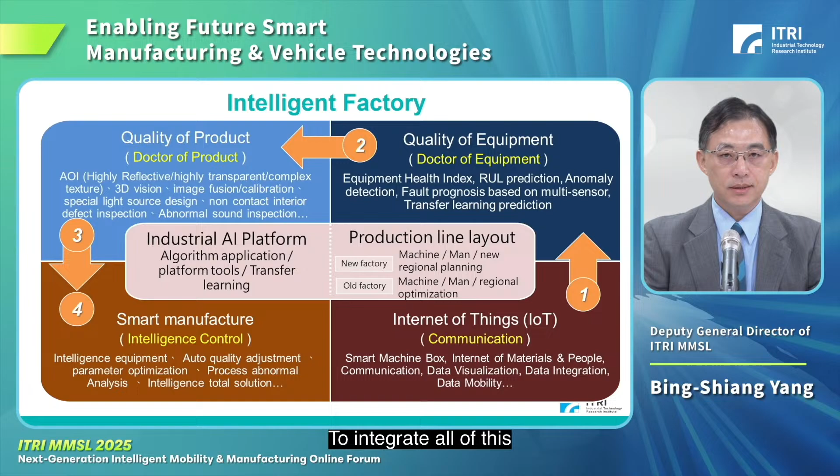For the intelligent factory, we try to connect equipment and materials together with the Internet of Things. We also have sensors integrated with our algorithms to quantify the status of the equipment, then connect the equipment together with the parameters. We also incorporate AI technologies in different stages of manufacturing to control the quality of the product. By integrating all of this, we can make the manufacturing process smarter. Here is an example: we are now trying to integrate systems into a 3D composite braiding system.

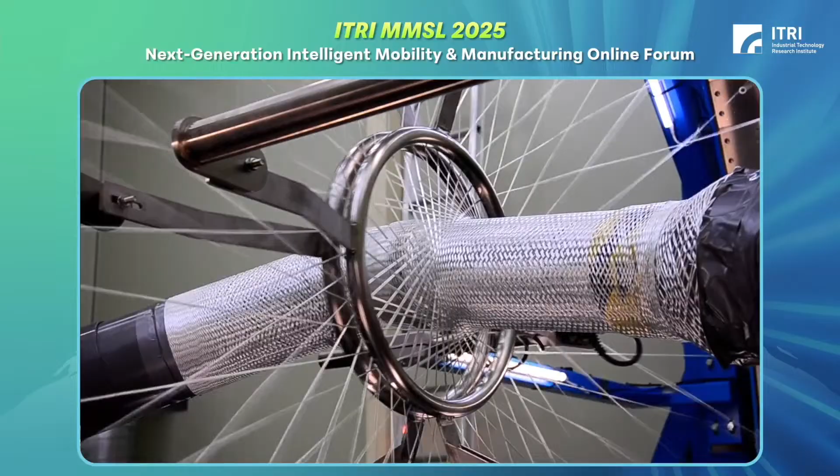As a world trend of low carbon or zero carbon emission, we try to reduce the energy consumption in different manufacturing processes with different strategies. The first one is to provide high efficient motors that can be used in different stages of manufacturing, and also low carbon thermal management systems with energy storage applications, such as high-speed flywheel technologies and supercapacitor technologies.

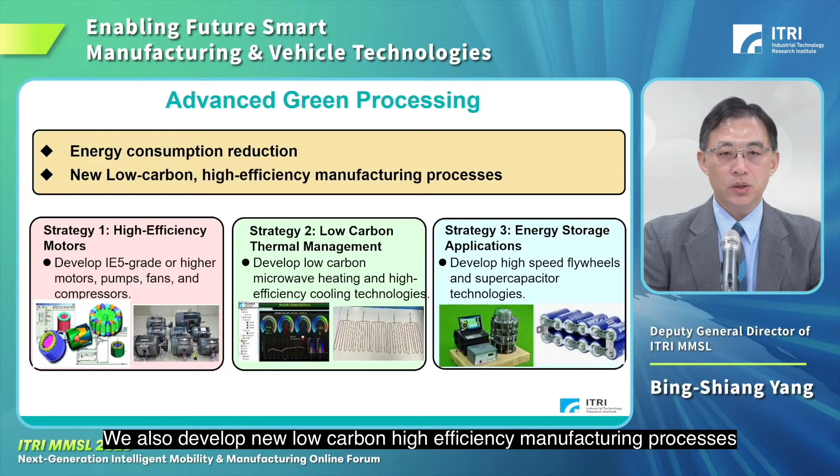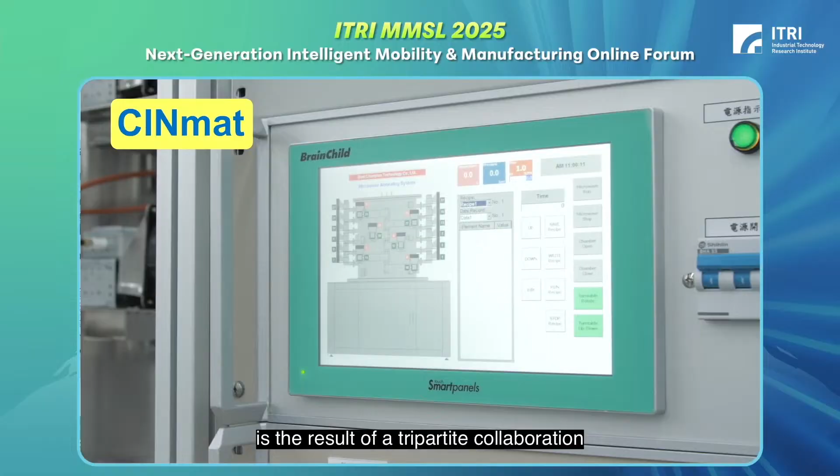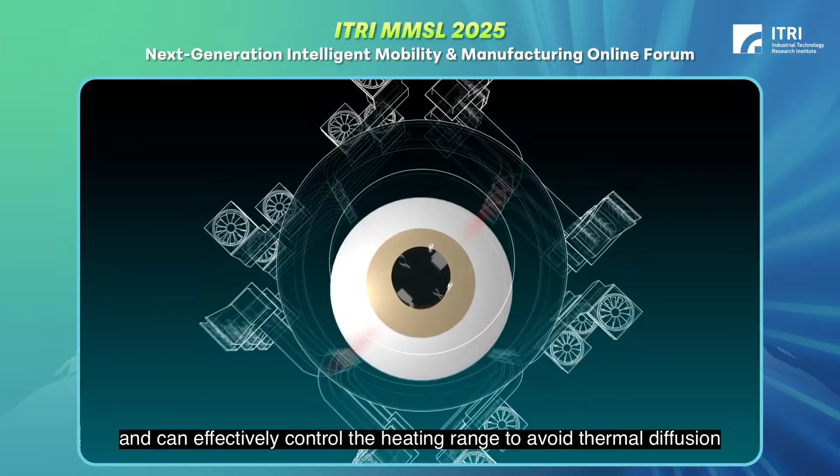We also developed new low-carbon, high-efficiency manufacturing processes. Here is an example: CINmat microwave annealing technology, the result of a tripartite collaboration between ITRI, National Jiao Tong University, and National Nano Device Laboratories. It can process multiple wafers at one time and effectively control the heating range to avoid thermal diffusion.

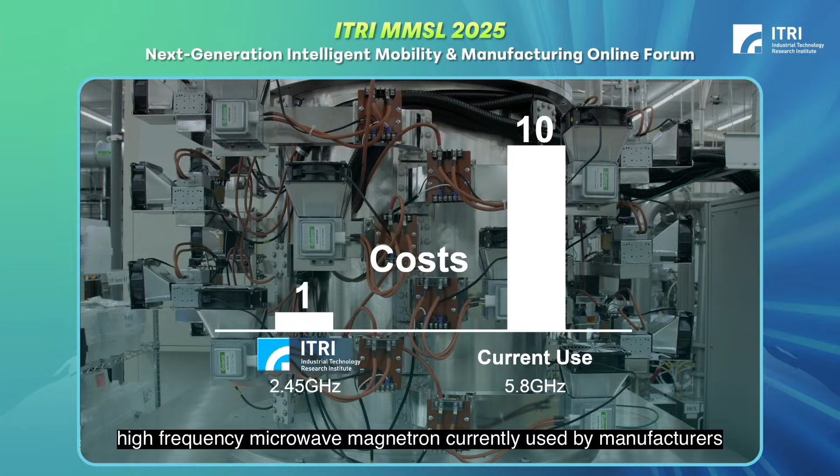The technology saves a great deal of time and energy compared to rapid thermal annealing. The frequency of the microwave tubes used is 2.45 gigahertz, the same as a typical domestic microwave oven. A 2.45 gigahertz magnetron costs only about one-tenth the price of the 5.8 gigahertz high-frequency magnetron currently used by manufacturers, while its average lifetime is six times longer, greatly reducing maintenance costs.

As you might know, Taiwan is famous for semiconductor manufacturing. We also have a division dedicated to these technologies, so we use multi-physics simulation in different stages of the manufacturing process, such as plasma etching or deposition, and wafer process for advanced packaging. We also provide grinding and polishing equipment that can be used on different materials, including optical components.

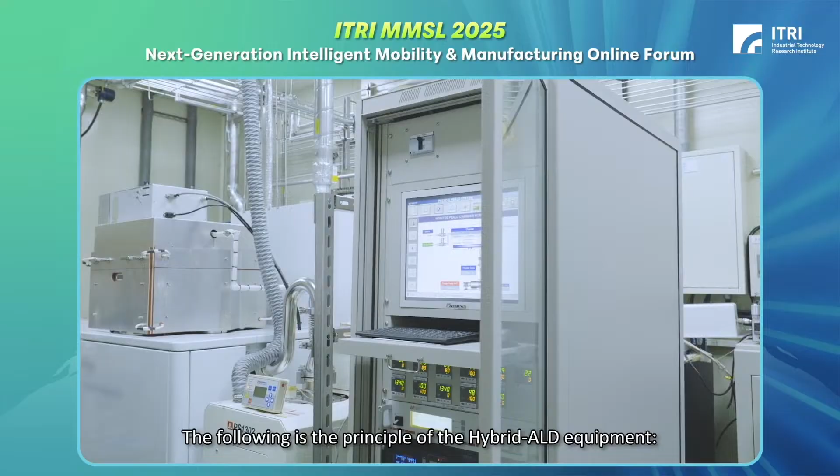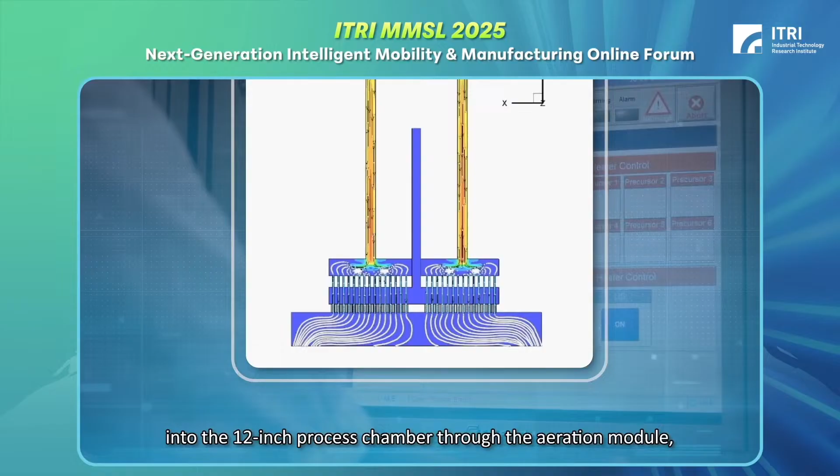We also integrate low fluoride or low carbon equipment in different industries for green technologies. The following is the principle of the hybrid ALD equipment. The vertical flow field is simulated by multiple physical coupling methods into the 12-inch process chamber through the aeration module, and the special aeration hole design is used to improve the uniformity of the overall chamber flow field.

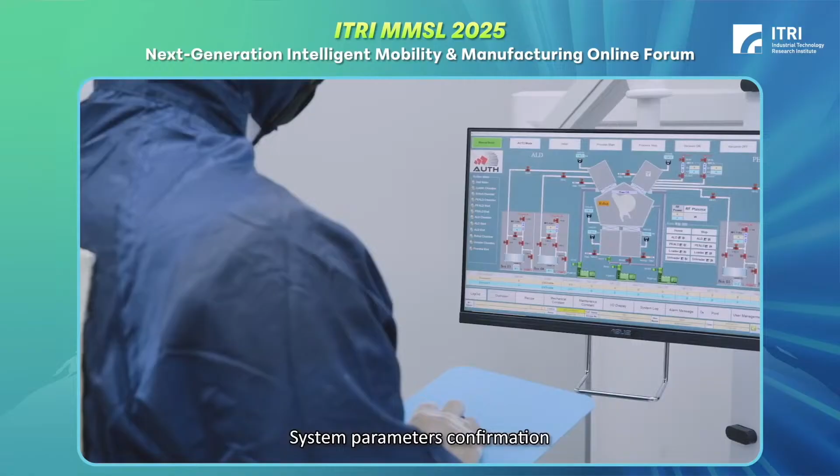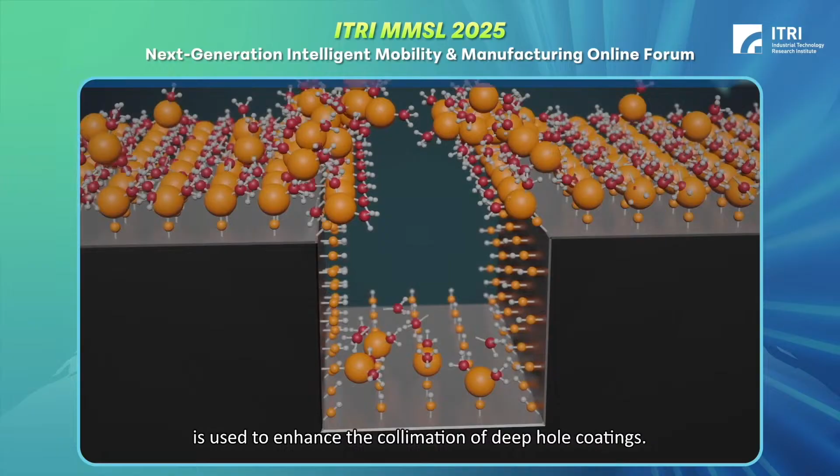Place the cassette into the wafer loader. System parameter confirmation. By adopting the crossover flow multimodal ALD technology, the thermolysis and plasma bias dual mode is used to enhance the collimation of deep hole coatings, thereby improving the compactness and deposition selectivity of the film layer, achieving multi-composition, high-step coverage, and uniform coating deposition. The robot arm removes the wafer from the process chamber and transfers it to the discharge chamber.

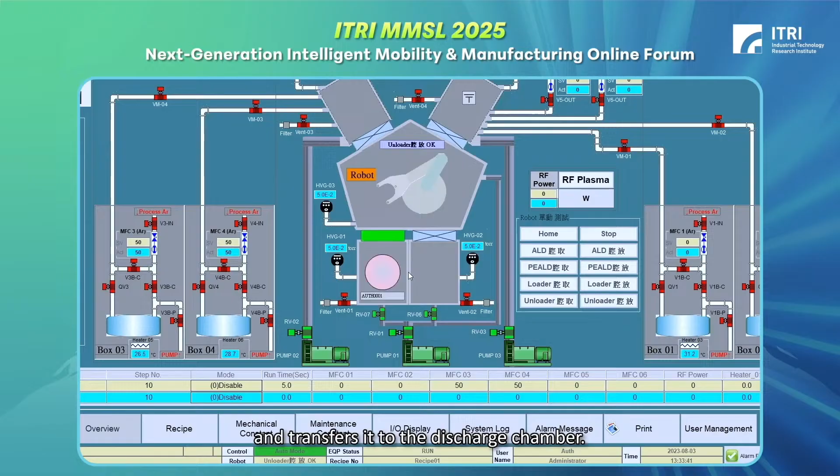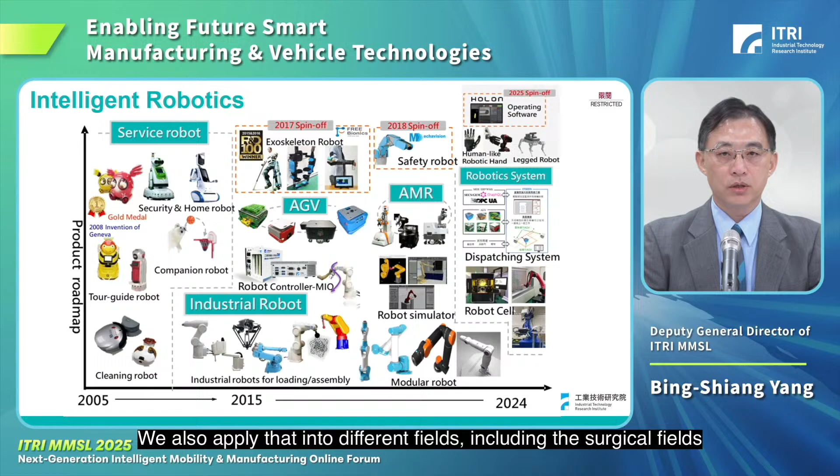To combine the different manufacturing processes, we need robotic technologies. Over the past 20 years, we have developed different types of service robotics, industrial robots, AGVs, and AMRs. We also apply that into different fields, including surgical fields. We recently have had international collaborations with many European countries on handling with AI-enhanced robotic technologies for flexible manufacturing.

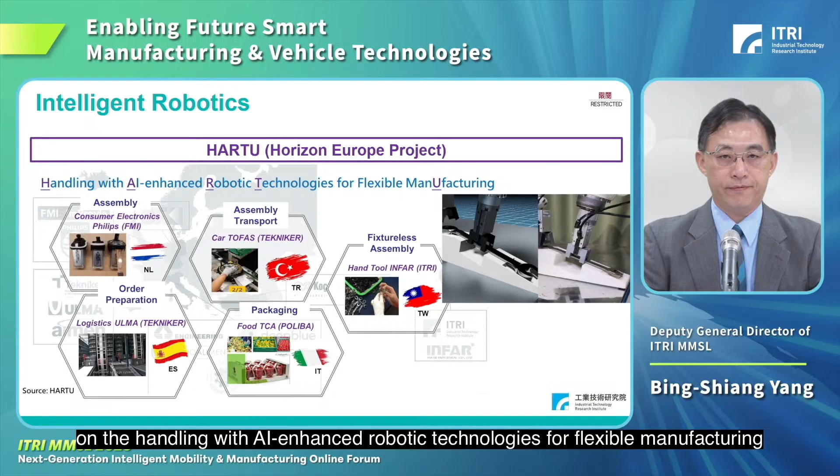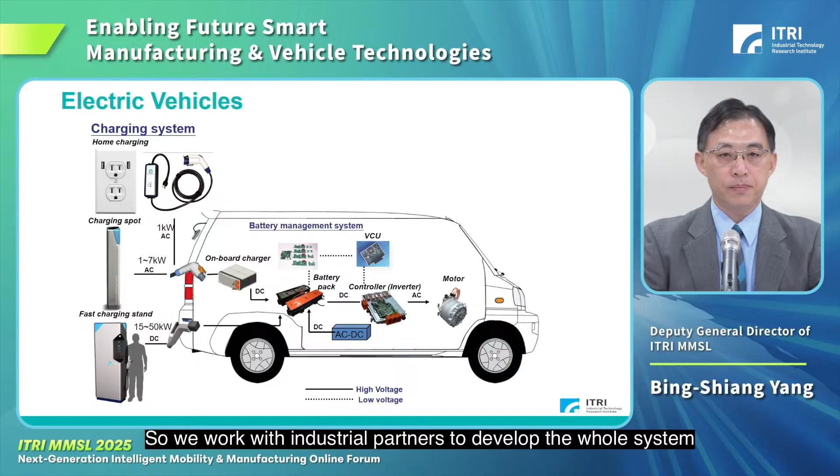That's for manufacturing. Now for mobility, we developed technologies to fulfill the needs for electric vehicles, from fast charging station, onboard charger, battery pack, battery management systems, vehicle control units, even inverter and motors. So we work with industrial partners to develop the whole system.

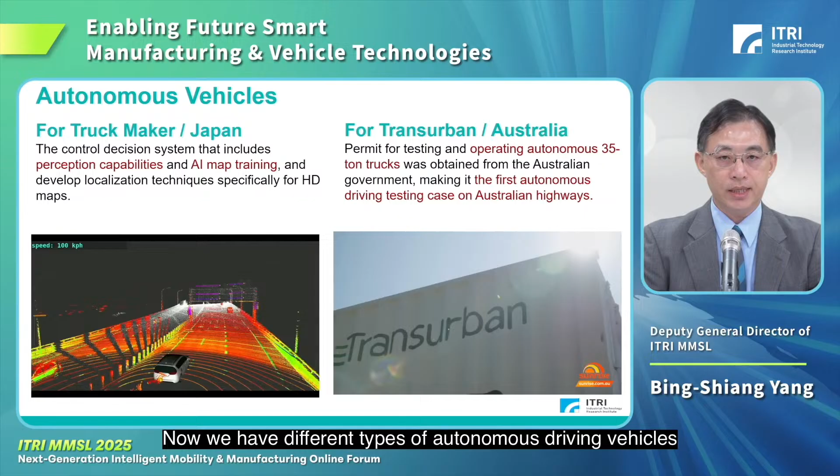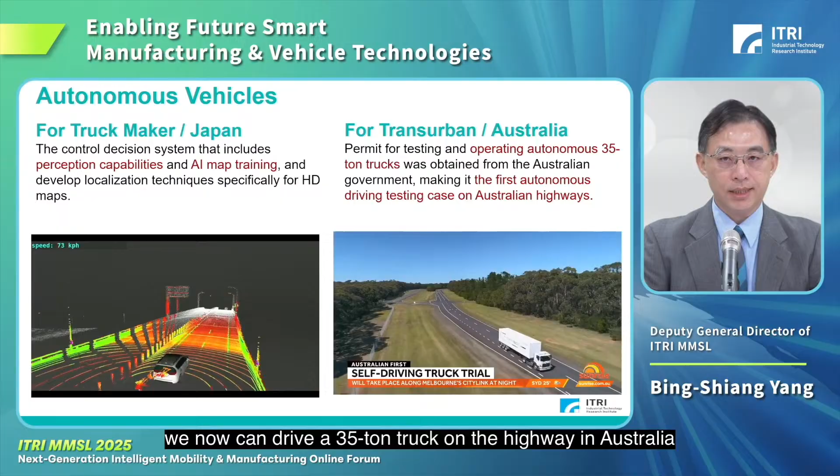We are also the first team to have the driving license to drive our autonomous driving vehicles on the real road. Now we have different types of autonomous driving vehicles. We also export these technologies to international partners, such as in Japan, where we now have high-definition map technologies. And in Australia, we can now drive a 35-ton truck on the highway.

That's for ground vehicles. In the air, we also have unmanned aerial vehicles. We target more on the high payload, specific application UAVs. Over the past few years, we have developed flight control technologies, high power motor generating technologies, and integrated them into systems with different payloads and applications.

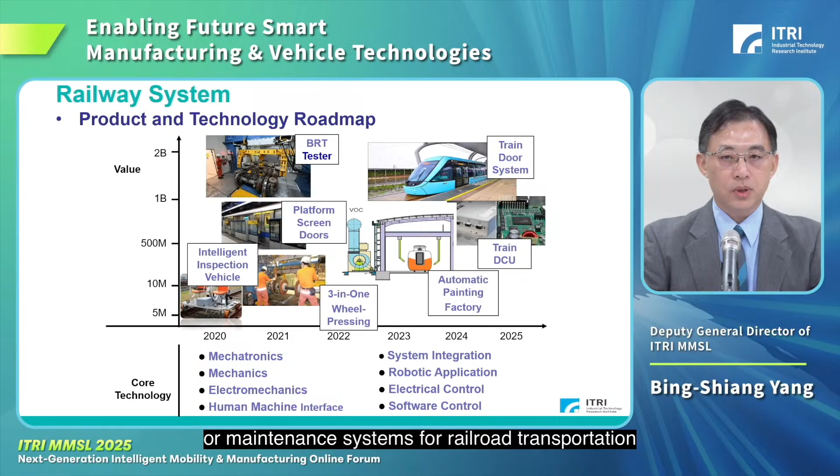In many developed countries, railroad transportation is a good means to transport from one place to another. So we have helped our railroad companies develop BRT testers, platform screen doors, intelligent inspection vehicles for railroad tracks, and automatic painting factories. We target more on the operational or maintenance systems for railroad transportation.

So with this, I give you a quick overview of our capabilities. If you are interested in any of the technology, feel free to contact us.

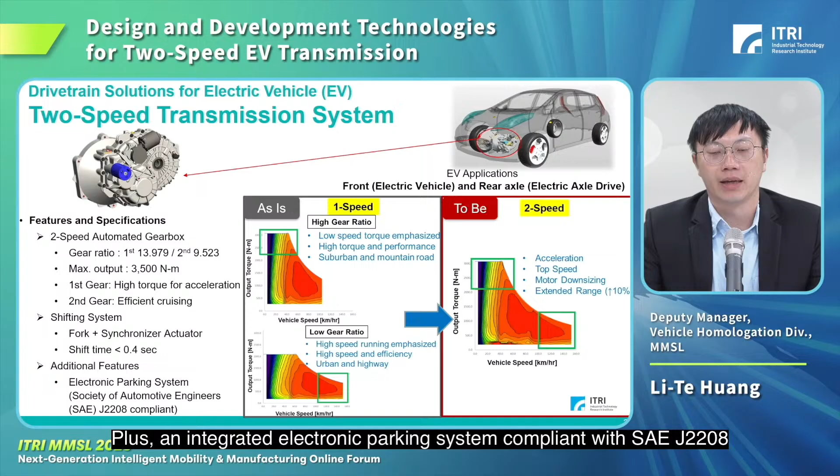Now, let's look at the specifications. Gear ratio of about 14 and 9.5. Maximum torque output of 3,500 Newton meters. Faster shifting in under 0.4 seconds. Plus, an integrated electronic parking system compliant with SAE J2208.

This slide highlights the core technical feature of our two-speed transmission systems. I will guide you through the three main areas that determine its performance and reliability.

Firstly, gearbox life calculation. To ensure durability, we perform comprehensive gearbox life calculations using model-based design tools and real-world load inputs. We built a multi-body dynamics model of the system to simulate torque cycle, bearing loads, contact stress, and thermal effects. Using this method, we predict a service life of 200,000 to 400,000 kilometers. This approach reduces development risk and accelerates design validation.

Next, two-speed gear mechanism design. The core of this system is a dual gear layout that provides high torque at low speeds and efficient power at high speeds. We optimize the gear structure, tooth geometry, and the torque path to achieve both high performance and compact design. The mechanism also integrates shift actuators and clutches, allowing flexible packaging for front or rear axle configurations.

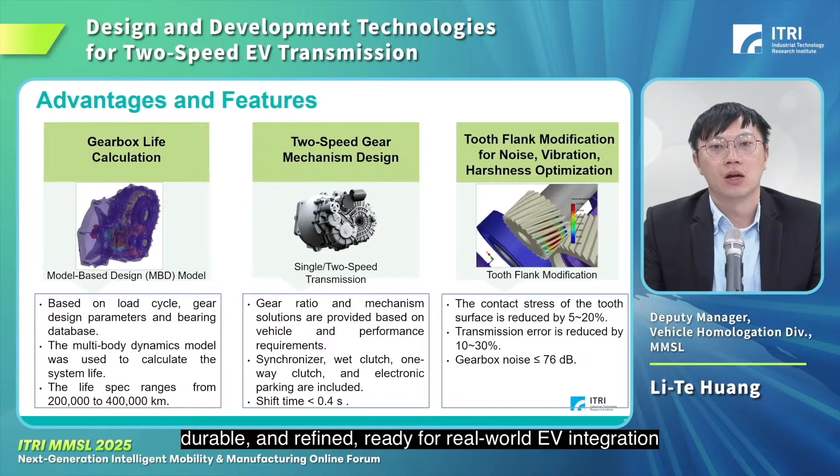Third, tooth flank modification for NVH optimization. To reduce noise, vibration, and harshness, we use tooth flank modification techniques, such as profile crowning and microgeometry correction. This adjustment allows smoother meshing impacts and smooth torque transfer as a result. Gearbox noise remains below 76 dB, meeting the quietness expected in electric vehicles. Together, these technologies make our two-speed system efficient, durable, and refined, ready for real-world EV integration.

At ITRI, we don't just build gearboxes, we provide complete drivetrain design support. From simulation to full documentation, this slide outlines the range of services we offer to our industry partners. Starting from the top row, we begin with vehicle-level simulation, including load cycle synthesis, vehicle modeling, and performance prediction. Next, we move into system layout and concept planning, such as power flow diagrams and transmission architecture.

In the third row, we focus on subsystem design, covering gears, synchronizer, clutches, electronic parking modules, and housing components. The fourth row centers on system level analysis, including integration, life estimation, gear contact patterning analysis, structural and modal behavior, and NVH performance.

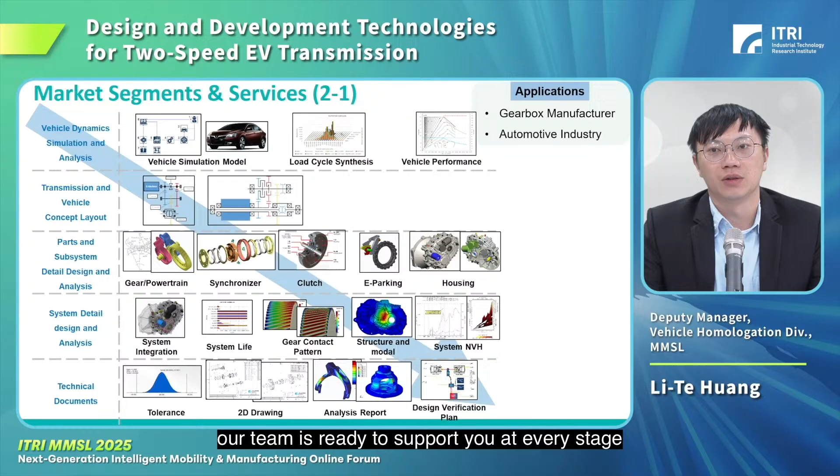Finally, we deliver technical documentation from 2D drawings and tolerance specifications to simulation reports and complete design verification plans. So, whether you're starting from a clean sheet or upgrading an existing design, our team is ready to support you at every stage of the transmission development process.

On this slide, we want to emphasize one key point. We don't just design, we validate. From manufacturing to testing, our team supports the full development cycle of an EV transmission system.

Starting from the bottom, we support gear and housing production, including casting, machining, and finishing of structural components. Moving up to the assembly level, we build and test both individual subsystems and complete transmission systems, ensuring proper alignment, tolerance control, and functional integration.

At the subsystem level, we perform gear contact checks, shifting tests, parking simulation, and backlash evaluations. At the top, we carry out full system validation, including critical speed analysis, torque performance testing, endurance and efficiency evaluation, and NVH measurement, all under real-world conditions. All test data is documented in detailed engineering reports and verification plans, forming a solid foundation for vehicle-level integration.

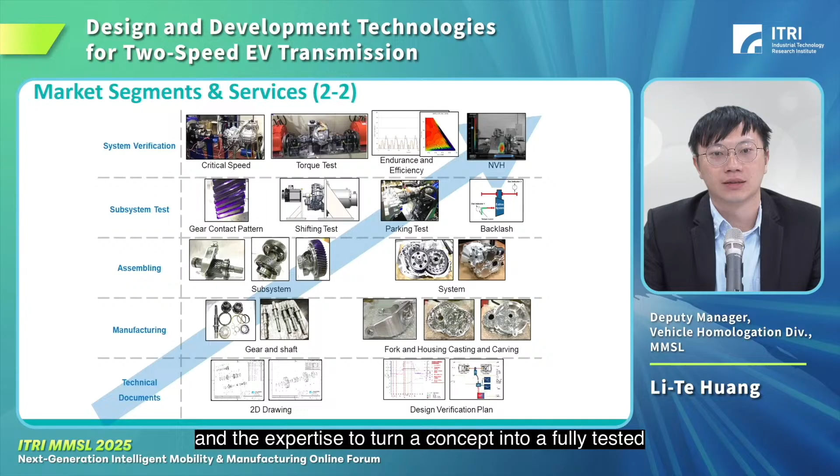We have the tools, the equipment, and the expertise to turn a concept into a fully tested, production-ready transmission system.

This final slide highlights an example of our two-speed transmission in action. We integrated the system into a Nissan Leaf platform and conducted testing at ARTC Proving Ground. The result was solid. Shifting time was under 0.4 seconds, delivering fast, responsive, and stable performance. The vehicle also successfully passed a 35% slope parking test, demonstrating high torque capability and precise control. Following this successful validation, the technology has been transferred to a domestic gearbox manufacturer and is now moving toward commercialization.

So what's the real impact of this two-speed system? For passenger cars, we see about a 10% increase in driving range, faster acceleration by 12%, over 50% improvement in hill climbing performance, and up to 18% increase in top speed. For electric trucks, it's an effective 7% more range, 10% faster acceleration, and more than 50% improvement in gradability.

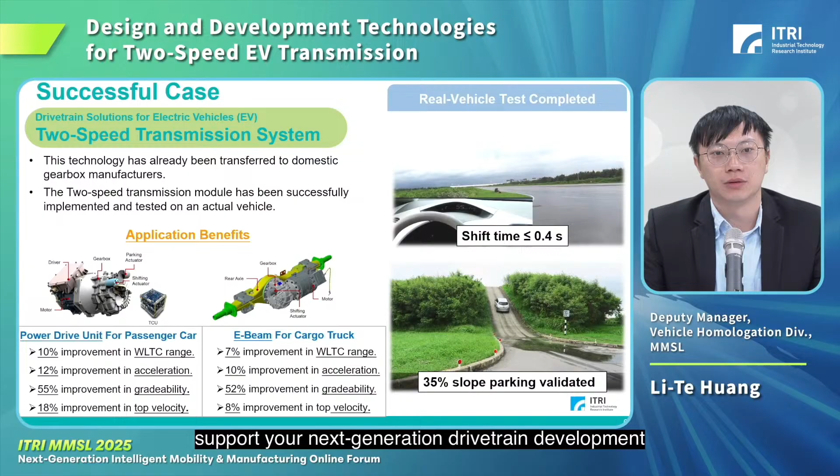Hello everyone, I'm Chu, a project manager, also serving as the electric energy testing laboratory supervisor, dedicated to EV charging technology at ITRI's Mechanical and Mechatronic Systems Research Labs. Today, I will show the digital communication conformance test for DC EV charging system. This test is crucial to ensure the charging interoperability between the EVs and the DC EVSEs. It's also one of the necessary test items for DC EVSE product certification in Taiwan.

If you want to charge an EV, first you need to plug the EVSE connector into the EV socket—that's the plug-in. Next is the auxiliary low voltage supply. When the EV is successfully connected to the DC EVSE, the DC EVSE will start delivering 12-volt power to the EV before the starting handshake.

Handshake is for the EV and the EVSE to confirm that they are connected to each other. After the handshake, the EV and the EVSE will inform each other of their required charging information through message exchange, such as EV battery parameters and EVSE performance. EV and EVSE confirm the capability at the charging parameter setting phase, meaning EVSE is confirmed to support the EV charging, and the EV can use the EVSE to charge.

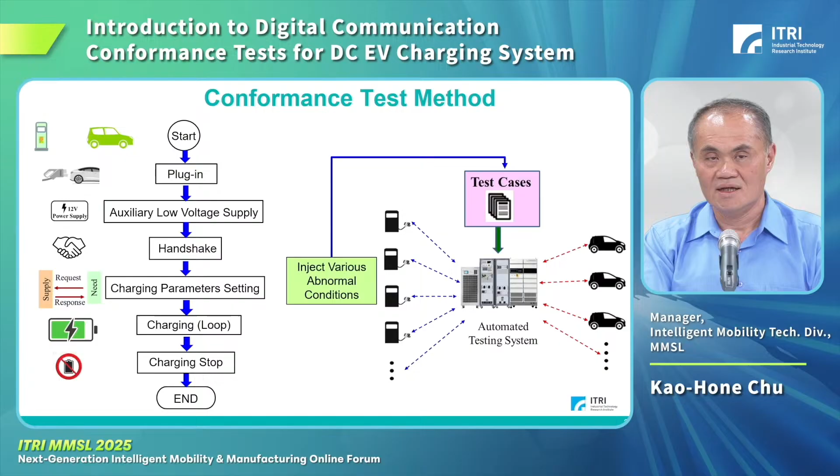So the next question is, how are the test cases developed? Let's take the combined charging system as an example. First, there are three necessary conditions for constituting a charging communication session between the EV and EVSE during charging: CP voltage, timing, and message.

CP voltage is used to control the progress of the charging phases or steps. After completing the plug-in, CP voltage is 12 volts. Then it changes to 9 volts to start the handshake and subsequent steps. When the CP voltage switches to 6 volts, it starts the step corresponding to high voltage power transmission.

The second condition is timing. Each stage or phase must be completed within a specified time, and both the EV sending the request message and the EVSE sending the response message must be complete within the time limit. Finally, the messages sent by the EV and the DC EVSE must be correct, including the message name and the element values within the message.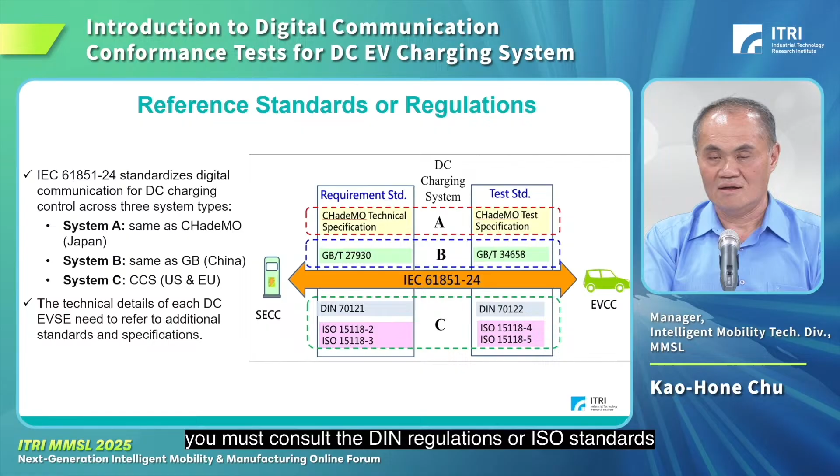The technical details of each charging system's requirements and test cases need to be referred to other standards under the specification. For example, if you want to understand the details of digital communication for System C, you must consult the DIN regulation or the ISO standards.

The digital communication conformance test is one of the voluntary product certification mandatory items for DC EVSE products in Taiwan now, and it will become a mandatory item for product certification registration next year. The Electrical Energy Testing Laboratory under the Mechanical and Mechatronic Systems Research Labs is one of the BSMI designated testing laboratories for verifying DC EVSE digital communication conformance.

The laboratory has assisted many Taiwanese manufacturers in completing testing and verification of DC EVSE and EV products, including Delta Electronic, eTreego, China Motor Corporation, and so on. We look forward to collaborating with domestic manufacturers and believe we can provide huge assistance in the development of DC charging system digital communication technology.

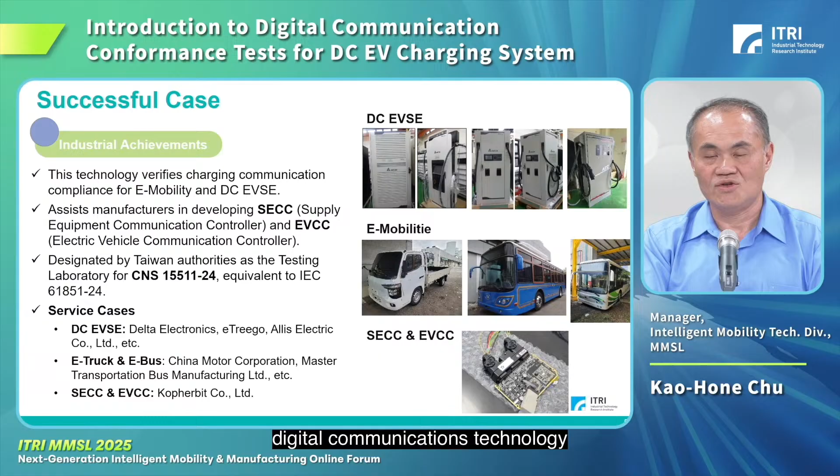Distinguished guests, ladies and gentlemen, good day. I'm Keng Hao Chang, Acting Deputy Manager from the Smart Factory System Integration Technology Division at ITRI. It's my pleasure to present our latest technological advancement in the AI visual inspection platform. My role involves integrating advanced AI technologies into industrial applications, enhancing both operational efficiency and reliability of industrial processes. First, allow me to introduce the AI intelligent probe recognition and adjustment system.

Traditional probe identification and alignment tests are often time-consuming and heavily reliant on manual labor, prone to errors. Utilizing AI image recognition, our system swiftly and accurately detects probes, automatically performs positioning adjustment and autofocus with micron-level precision of plus or minus 2 micrometers. Moreover, with big data training, the system accommodates various probe types, significantly reducing manual operations and associated errors. Overall, our system enhanced probe adjustment speed by 10 times and reduced inspection time by over 50%, substantially boosting production efficiency and inspection quality.

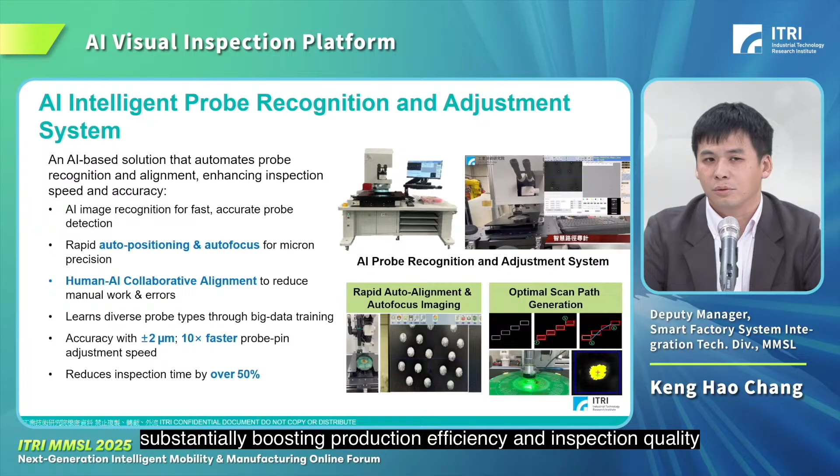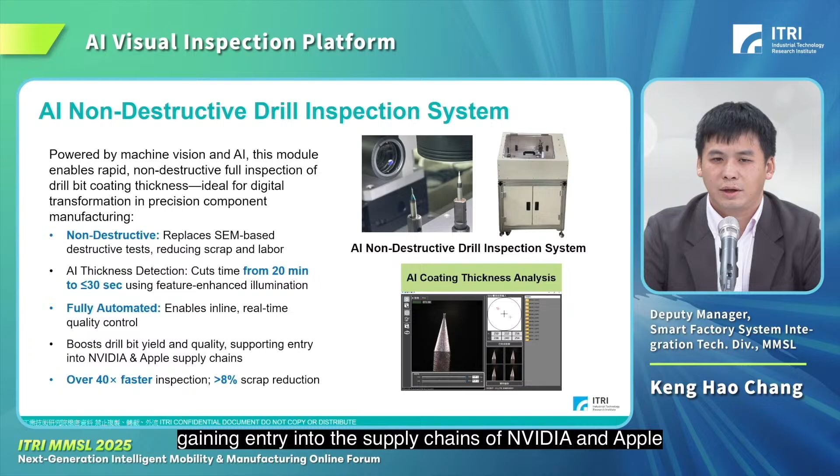Next, we have the AI non-destructive drill inspection system. Traditional drill bit coating thickness inspection typically requires destructive testing methods such as scanning electron microscopes (SEM), which take around 20 minutes and generate considerable scrap. Our AI-based solution, combined with specialized illumination techniques, performs non-destructive thickness measurement in less than 30 seconds, improving inspection speed by over 40 times. Furthermore, the system fully automates real-time quality control, significantly reducing scrap rate by more than 8%. Our partner companies using this system have successfully enhanced quality and yield, gaining entry into the supply chains of NVIDIA and Apple.

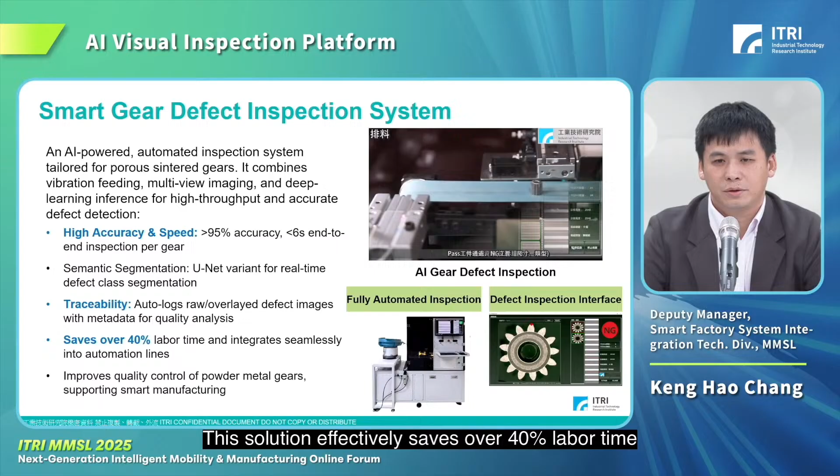The third system is the Smart Gear Defect Inspection System, addressing inspection needs for porous sintered gears with a developed automatic solution combining vibration feeding, multi-view imaging, and deep learning inference. The system achieves over 95% accuracy with inspection times per gear under 6 seconds. Utilizing UNet architecture for real-time segmentation, it accurately classifies defects on the gear surface. Additionally, all inspection data are automatically recorded and uploaded, providing comprehensive traceability to support quality analysis and seamless integration into automated production lines. This solution effectively saves over 40% labor time, significantly enhancing quality control for powder metallurgy gears and advancing smart manufacturing.

Finally, I would like to introduce our AI magnetic particle inspection technology. Traditional magnetic particle inspection images often contain substantial noise, leading to higher false positive rates. We developed an AI software solution capable of recognizing abstract and blurred defect images by learning complex and diverse graphical features from big data, effectively reducing false positives. Coupled with customized hardware, the system can be instantly integrated into production lines, quickly delivering inspection results. This technology not only aids in high-grade steel production, but also significantly reduces personnel exposure to ultraviolet light, enhancing workplace safety.

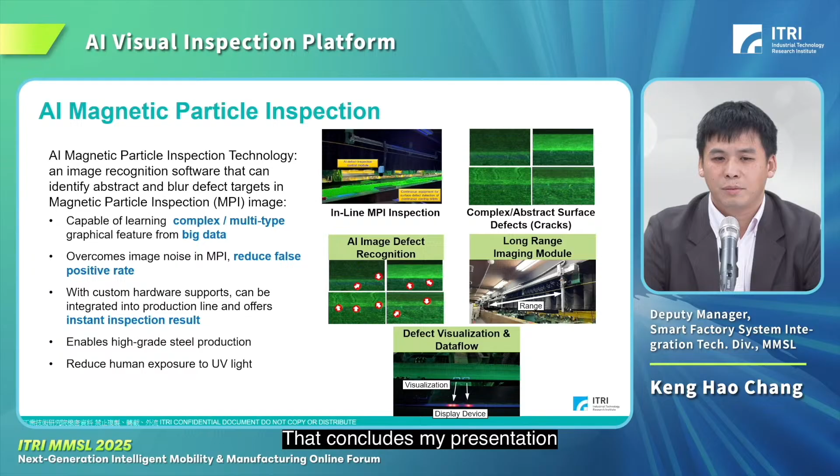In conclusion, the AI visual inspection platform not only promises enhanced accuracy and efficiency in defect detection, but also significantly improves workplace safety and product quality. As we continue to refine and expand the application of these technologies, we envision a future with AI-driven inspection systems becoming a standard across industries, ensuring quality and safety go hand in hand. We are committed to ongoing innovation and collaboration with industrial partners, aiming to drive digital transformation, enhance smart manufacturing capabilities, and create sustainable competitive advantage for industries. That concludes my presentation. Thank you very much for your attention.